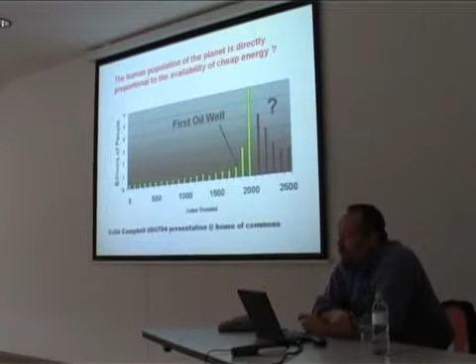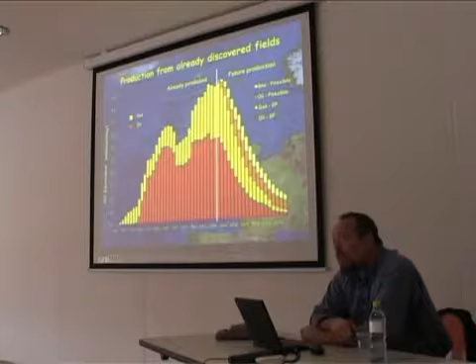The first idea is to communicate that the human population of the planet is directly proportional to the availability of cheap fossil fuel. And with peak oil, peak gas and peak nuclear all happening within the next 10 to 15 years, with simply not discovering enough mineral reserves to cope with increasing demand, particularly from the developing world, South

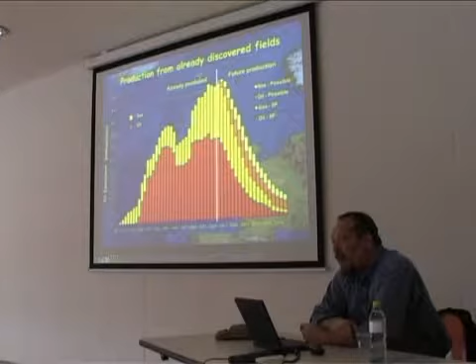America, China and India. It's clear that all of society, as we know it, will have to one day run off the limited supplies of renewable energy that are available within our respective national boundaries.

And as climate change accelerates, and there's a great deal of controversy about whether climate change is happening, but in the UK, not too much debate.

We're already finding spring comes 2 weeks earlier every year, and the weather is changing quite dramatically with very high levels of rainfall. But most important of all, flooding: too much water in the winter and not enough in the summer. So the traditional cliche of London as being a rainy, gloomy city is about to change.

What's critical is that 2/3 of the world's productive farmland will be lost by the end of the century.

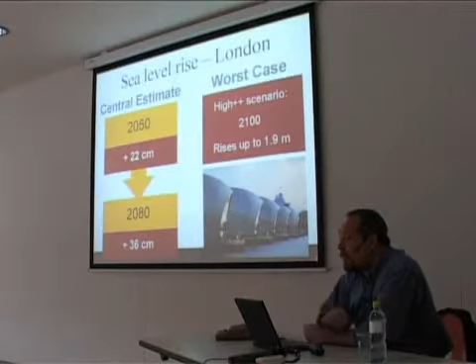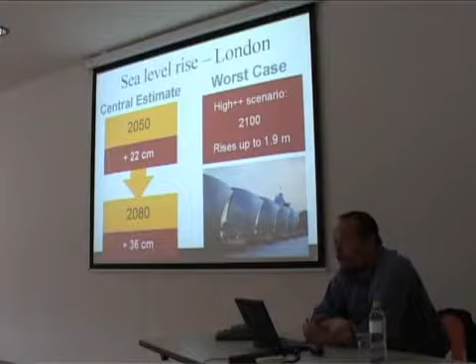And my country—this is a government slide from the Minister for the Environment—the claim is if we continue with carbon emissions as predicted, we're going to have around about a 2-metre rise in sea level and the average level of the Thames, and great chunks of London will be flooded by the end of this century.

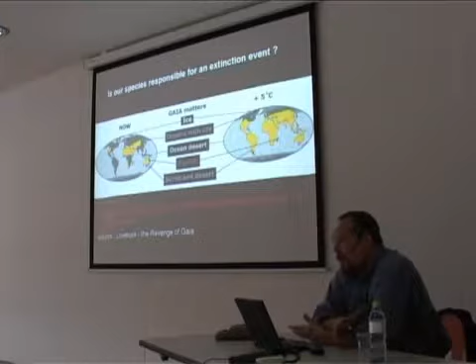So really, it's part of the architect's duty now to examine how we work, how we can design low-carbon lifestyles and work styles that mean people can choose an alternative way of life without thinking too hard and without trying too hard. How do you slip into this new paradigm, this new way of living on the planet?

And then there's another metric to discuss, which is the ecological footprint. The ecological footprint of London is the same as the rest of the United Kingdom. So all of the territory of the entire country would be required to sustain London.

So where do all the other cities find their sustenance? From other countries, but other countries don't have or won't have resource to trade. And I come from a country where we've just spent round about £60 billion fighting for fossil fuel outside our national boundaries. So to say that we haven't got the cash or the money to change the way our infrastructure and move towards a society that runs off renewable energy is ridiculous when we have enough money to fight for oil.

So the strategy we do—and this is a slide I produced 10 years ago now—is to try and look at how you can get a step change reduction in environmental impact at the same time as increasing overall quality of life. And we did a survey working with a local environmental charity called the Bioregional Development Group in South London.

And we found that a typical carbon footprint of a suburban Londoner in our area: a third of their carbon footprint was attributable to food miles, with the average British meal having travelled 2,000 miles from farm to dinner plate. A third was private car use, transport and commuting. And a third was heating and powering their home. And that was just at the turn of the century.

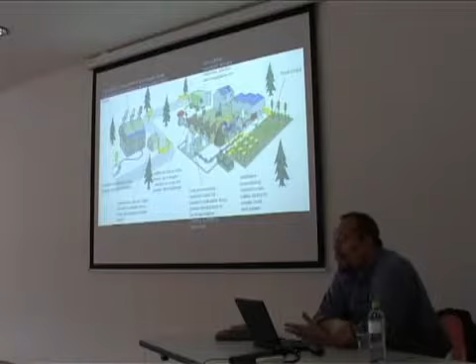We've started setting up things called zero fossil energy farms, where food is grown without using fossil fuels. Nutrient waste from the urban developments is fed back in to refertilise soil, agricultural systems, and food is delivered in zero emissions transportation using no packaging, so there's nothing to recycle. So that's how you set up a system, and then you can develop a whole framework where every single human activity feeds into the next, so there is no waste.

And we're really interested in this holistic systems thinking. Very difficult it is too, and very hard to build into very small projects, because as architects we only get given very small jobs. But if we don't start to agree on a system like this and think like this, it's not possible to achieve this overall transition from a fossil fuel addicted society to one that is actually capable of running indefinitely using the natural resources from within its own bioregion.

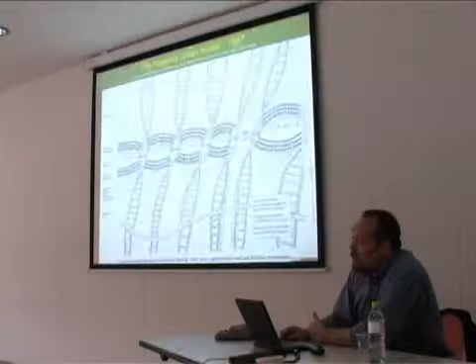And a lot of people say, well, what's the point in all this green stuff when you just simply buy a punnet of strawberries from Israel, which has been air freighted over, or runner beans from Kenya? My response is you can go quite easily and buy fruit or vegetables from a local farmer's market in brown paper bags on a bicycle, transported by your rucksack. And then all of a sudden you really need a zero carbon home and a zero carbon workplace. And these are the models that we've been developing over the years.

This is the area of productive land between these two wiggly roads, created enough subsistence food, if you like, and energy to run the linear community that was clustered around a solar-powered light tram system, with swale zones and rainwater storage lakes feeding biomass coppice with combined heat and power plants, and workspace mixed with housing around these little village greens.

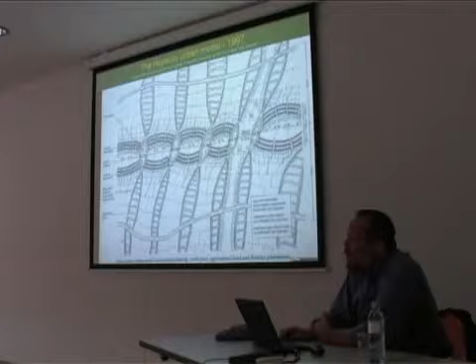So that's very idealistic, very theoretical. And really, how do you then change that and move that forward into a real practical project?

And this is a house we built 20 years ago now in South London. It's not exceptional, but it did try and anticipate a lot of these agendas. And we don't claim our work's perfect. We know it can be better. We know you can all do better. The point is, you have to start somewhere and you have to improve on it incrementally.

So this house was designed, we knew that the rivers were going to flood, so it had a completely brick ground floor, there was no plasterwork. All the services came down from the floor above. There was a thermally massive concrete first floor, and then a very lightweight timber frame for the upper two floors, which was mainly done for cost and reduction in embodied carbon.

The building, we had almost no money for windows when we built this. So we built a conservatory out of softwood, and a very simple aluminium patent glazing system which enabled us to clip renewable energy systems in as we could afford them.

Over the years, it's getting closer and closer to being a zero-carbon house. So money isn't actually an excuse for not delivering these ideas. Here you can see evacuated tubes, solar collectors added. There's photovoltaics recently been added to the top facet, and there's more coming as I can afford it.

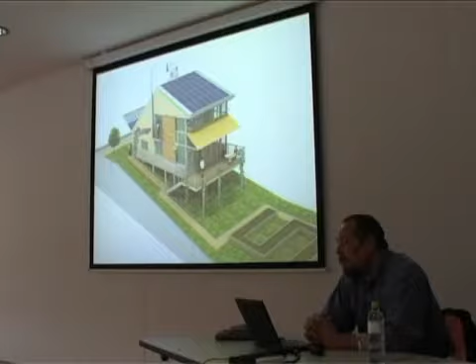Where we are is we've just got to the point where all those ideas in that house are now commercially available from your local DIY store, and you can buy a kit house called RuralZED, with absolutely everything: solar panels, wood pellet boiler, super insulation, passive heat recovery ventilation. It's much more technically sophisticated than the house we built 20 years ago. You can buy it at a fixed price and literally just go and build it yourself in about a month. So where did all this come from?

I did 14 years at Michael Hopkins and Partners, a big London firm, and this is one of my projects, Nottingham University New Campus. What this taught us was that the biggest problem with trying to achieve low-carbon architecture is economies of scale. What you can do on a £35 million university campus is quite different from what you can do when somebody asks you to design a single private family home.

By very careful repetition of details, and by very careful consideration of the industrial manufacturing processes within each works package, we were able to reduce the cost so that this came in at about £850 a square metre, which wasn't very much more than an absolutely bottom-of-market building regulations construction. But it was done at a large scale.

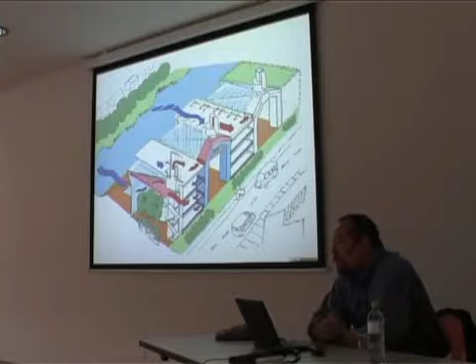What's interesting about this project is it uses very simple techniques: thermal mass, low pressure drop ventilation, photovoltaic powered heat recovery, wind assisted ventilation, passive solar gain, atrium spaces, a little bit of passive cooling from rainwater storage lakes, shelter belts.

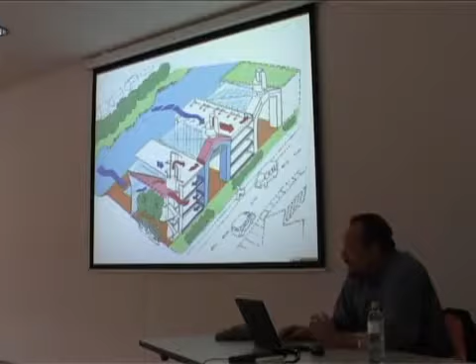All these ideas were coming in, and what's exciting for me is that that actually genuinely changed the architectural forms. It changed the forms of the master planning. It made a pedestrian promenade beside a rainwater storage lake the pride of place. All the cars were flung to the north. It created lots of transitory transition spaces in the form of atriums, which could provide casual meeting places for staff and students. They didn't actually cost any more than providing an external wall.

And the solar electric panels shown in the middle third of that atrium roof actually power the very low pressure drop Munters wheel and heat recovery unit, which reduces the heating load in the winter and reduces the cooling load because there's lots of computers in the summer.

So we'll be using tricks like using staircases as return air shafts, using corridors as return air shafts, using low pressure drop floor plenums, thermally massive raised floor tiles, exposed radiant ceiling soffits — all these tricks which cost very little, but when you put them together, the whole is very much greater than the sum of the parts.

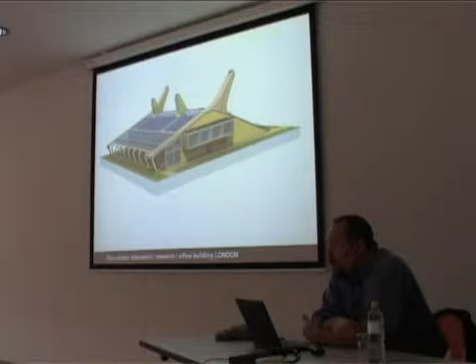So where have we moved from there to today? We're producing, we hope, the first climate neutral industrial building. This is incredibly low embodied carbon to build in the first place, and a sufficient amount of renewable energy systems are incorporated into the building fabric to enable it to meet its annual running cost and pay back the embodied carbon of the original construction over a 25-year period.

So the carbon debt is paid off within 25 years, and then over the rest of its life it becomes energy positive. If the renewable energy surplus produced each year is used to offset fossil fuel electricity from the UK grid, then it actually helps to repair the climate.

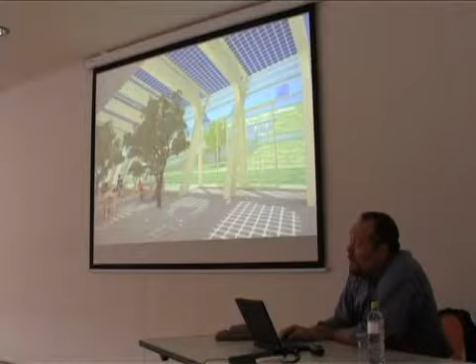So this is an example of the construction process and the building design starting to really transform, to really move into a new aesthetic. What interests me is how the building form, the morphology, the planning, the spaces and the materials start to be informed by energy efficiency and then by renewable energy harvesting techniques. I believe this blend of engineering and architecture creates a new aesthetic which defines the new zeitgeist.

And this is important because a lot of people say, oh, renewable energy systems, energy efficiency — it's an engineer's job, go away, try and tuck it into a basement, don't let it change my architectural forms, don't let it restrict my architectural expression. And I hear this a lot.

But I think where we're going is a new architectural language. This is the continuation of the modern movement, which is designed to create this survival — the infrastructure for our collective survival.

So what we found on this building was that, for this particular client, pretty well all of the energy consumed was electricity, and it was used for ventilation. They had very high levels of ventilation running virtually all the time because they hadn't actually worked out that it was even worth turning these systems off.

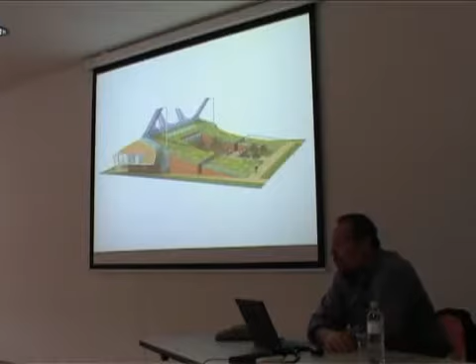So we found in a survey that the building was only occupied for 30% of its time — 70% of the time it was asleep. So we designed a building that didn't need any energy to be asleep, virtually shut down, and then when someone came into it and activated it, it woke up and used a tiny amount of energy when it did. That's how all these tricks start to come off.

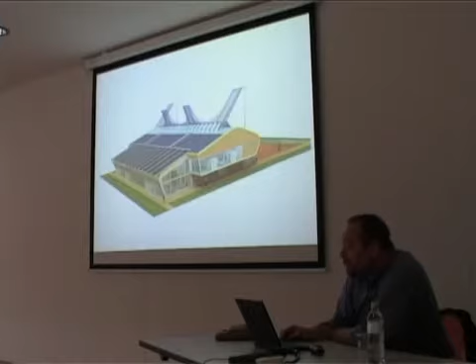So this is possibly the industrial estate of the future, or the office park of the future. And where we got to a long time ago was a conclusion that had already been come to in this part of the world, particularly southern Germany, with the work done by the Passive House Institute.

The conclusion was that actually a zero heating specification was very easy if you had enough thermal mass, reduced losses through ventilation, and very high levels of insulation.

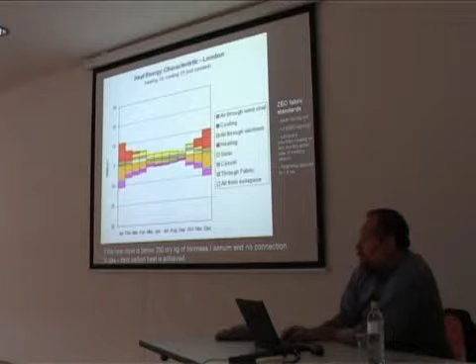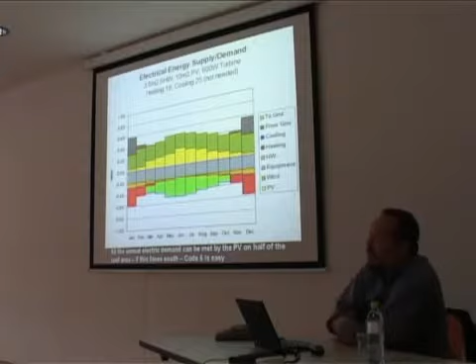And then we found that by being very careful with renewable energy systems, we could just about, over the course of a year, generate enough total electricity to meet the overall annual demand. That would mean exporting in the summer when you're generating too much, and importing in the winter when you're not generating enough.

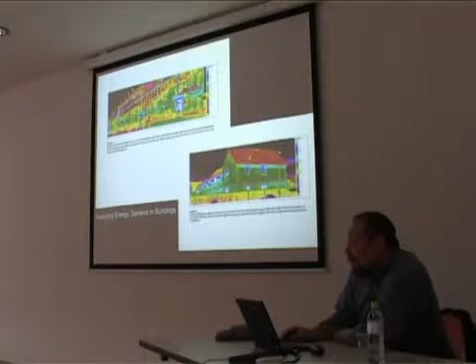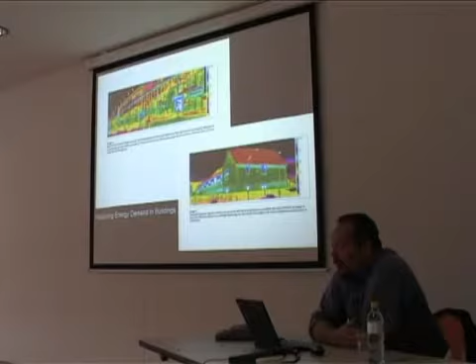These are really slides showing the infrared effect, showing how BedZED's south facade has more or less the same, or has a better heat loss than the insulated wall of the building regulations development immediately over the fence.

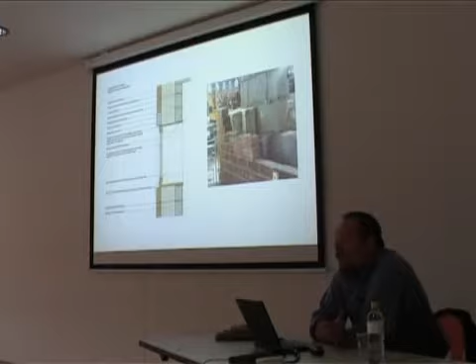And we had very simple construction details: using granulated blast slag cement replacement as a load-bearing inner leaf, hollow core planks spanning between cross walls, 300 millimetres of mineral wool insulation — rock wool, for its vermin resistance and non-combustion — and then any locally available rain screen, whether it's the nearest brickworks to the site or green oak framing.

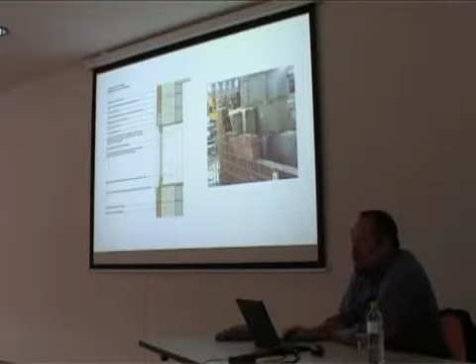And we invented a special two-part wall tie, which made the construction of these 300mm cavities very easy. So this was 10 years ago or so.

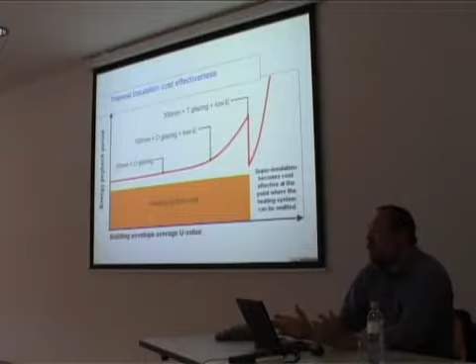And what we found was that if you did this properly — 300mm of insulation, triple glazing, and low-E glass — you're actually able to take out a heating system entirely. The cost of removing the heating system paid for the increase in the fabric performance.

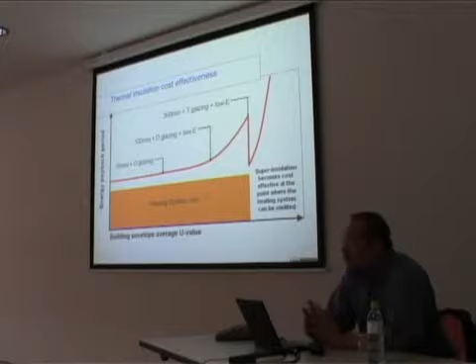So it's a virtuous circle. If you went and did only a little bit of extra insulation, then it really didn't work. And this was a slide we used at the time to get BedZED built.

The next big idea is passive heat recovery ventilation. We do not subscribe to the passive house idea that you would have a fan running for the life of the building. So I'm going to show you some of these techniques and technologies which we've developed over the years, and try and explain how that affects the architectural form and creates a new aesthetic and a new way of planning.

So using displacement ventilation, if you duct that into the bottom of a room and extract stale air at the top of the room, you get a room that is breathing all the time. No fan is needed, no electricity is needed. You have to fit less solar panels on your house if you want to be zero carbon. And above all, there's very little maintenance, and it generally works very, very well.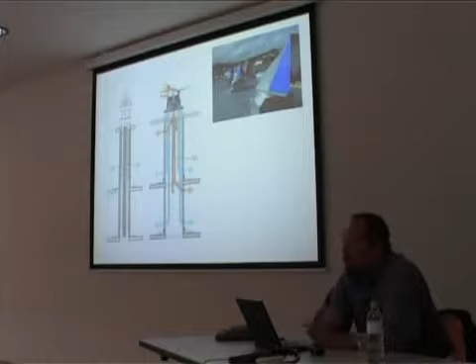So we spent a lot of time and money wind tunnel testing these, working with Arup. This is the National Physical Laboratory in Teddington, and trying to get them to rotate down to 1.5 meters per second wind speed, while measuring the suction to make sure there was enough push and pull to get the ventilation system to work.

And that's part of the industrial design process. But if we hadn't tried to perfect this particular technology, it would be harder for us to deliver affordable zero-carbon solutions in the UK and other countries. We've now gone into mass production in China on this particular idea.

Where we've gone to is we've modified the heat exchangers to use porous flat-plate heat exchanger plates, which are dipped in a lithium salt, which absorbs moisture from the incoming fresh air, so you get a little bit of passive dehumidification. Then we use solar evacuated tubes, solar thermal tubes, to boil the water off the lithium saline solution, regenerating it and enabling it to be passed back through the heat exchanger again. So it's a zero-waste process, and at the same time it also cleans and scrubs the air, takes out particles, reduces asthma inside the house. And the good thing is it kills SARS, which is really, really critical in certain parts of the world.

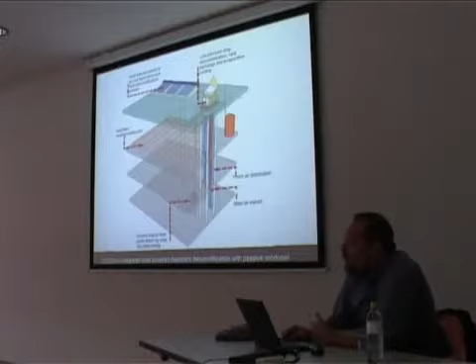So that's how these kinds of technologies, if you like, call it solar dehumidification and possibly solar cooling technologies, are going to change architectural form in many parts of the world.

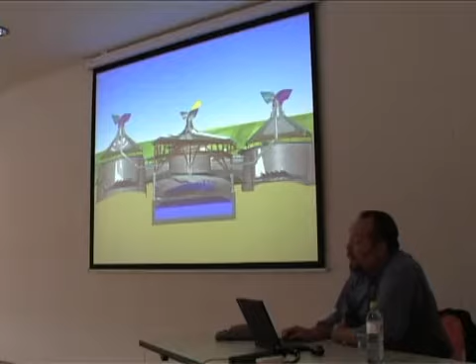So this is a building we've completed about 12 years ago at the Earth Centre in Doncaster, and it's a conference centre. It sits on an interseasonal heat store. It has all the heat recovery ventilation ideas, but the big innovation there was it was actually built from reclaimed materials, so about 80% reclaimed by volume.

This is BedZed. This is the combined heat and power plant, and this runs on urban tree waste. So basically, urban trees grow over roads, need pruning every year, and these prunings can be chipped and heated without oxygen to produce a hydrogen-rich methane gas, which is then cleaned and squirted into a spark ignition Scania truck engine, or in later slides I'll show a fuel cell.

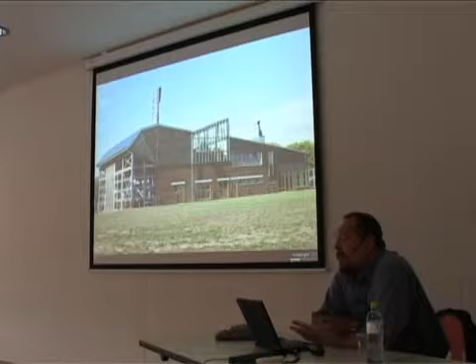But what was interesting about this building is that it has a power station, it has a grey and black water treatment plant in the glass house, it has changing rooms for the local community football pitch, it has a village hall stroke dance hall, and it has a community cafe. And that's what interests us, is combining all these rather strange functions into one shape or one roof.

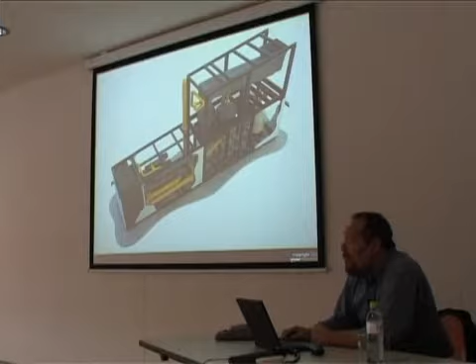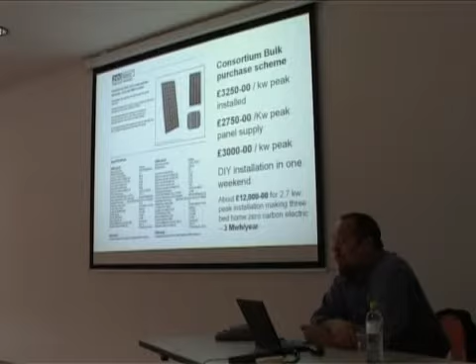The least successful technology we've been involved in has been the biomass-fueled combined heat and power plant. And frankly, the BedZed one ran for about 1 year before the company that ran it went bankrupt, because they had to strip it down every 3 months to clean all the carbon out of the pipes. However, 10 years later, this technology is now perfected, and we're now going to reinstall that idea. So there's a lot of soul searching, a lot of ideas like this need testing.

The next idea is simple solar electric panels. How does that affect architecture? Now, we've got to the point where these panels have actually come down since this slide. They're now about £2,500 a kilowatt peak. So a 3-bedroom family house, certainly in the UK, probably in Lausanne, for certainly around €10,000 would have free electricity for the rest of its life.

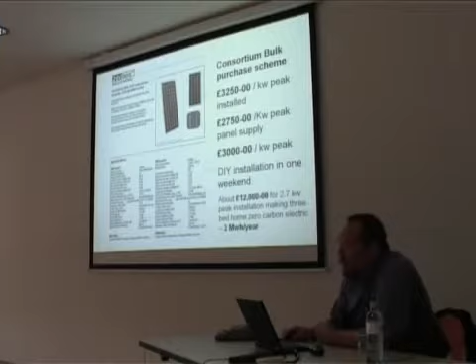This is important, and it has only happened because the developing world, particularly the Chinese and possibly the Germans, though their panels are still rather expensive, went into volume production. The last solar panel manufacturing plant I visited employed 2,500 people and was about the size of EPFL.

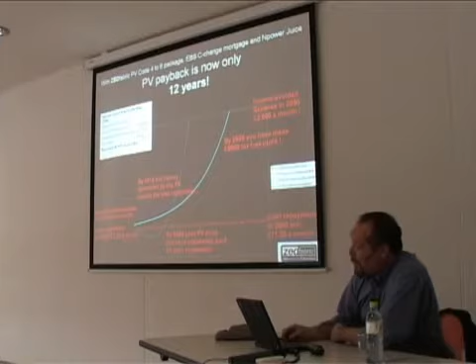What we're developing at the moment is photovoltaics integrated into the roofs of buildings. We're developing translucent tiles so that previously unusable attic roof space can become a delightful conservatory, a non-heated extension to your living area, providing it's adequately vented. This is a Georgian house in Southend that's just had this conversion.

I'm going to quickly show what happens with these projects. This is a grey and black water treatment plant, the living machine at BedZED. It's currently decommissioned, mainly due to running cost. You can get an idea that works technically, but if it costs too much to run in terms of labour, it will not survive.

So what's happened now is that the water company took over this technology and wanted to prove their own was better. They built an advanced membrane bioreactor, put in a shipping container just next door to this installation. Of course that's lower cost to run, but it uses double the electric consumption. So this doesn't mean the original was wrong, and in certain situations it is very much right.

The next idea is how to design buildings made out of reclaimed materials, because we've already extracted enough material from the ground, from the earth.

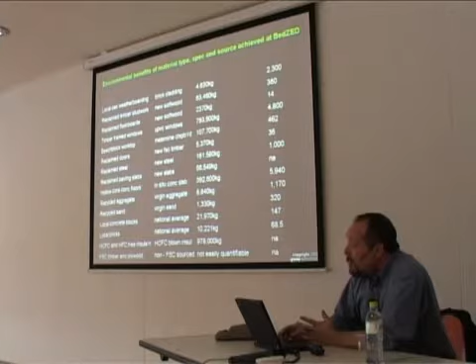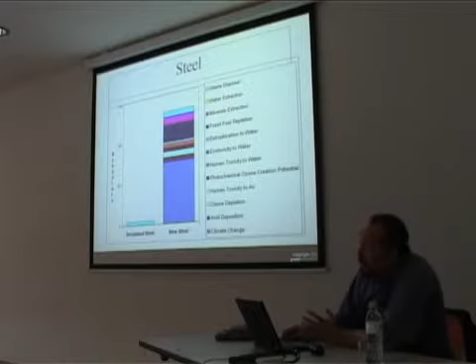We're very proud to understand where your embodied carbon goes, because if you're trying to sort out climate change, embodied carbon becomes almost as important as running carbon, and certainly on very low energy buildings that becomes the case very, very quickly. But if you're trying to achieve climate neutrality, understanding the carbon footprint of different materials and using reclaimed materials rather than new becomes absolutely critical.

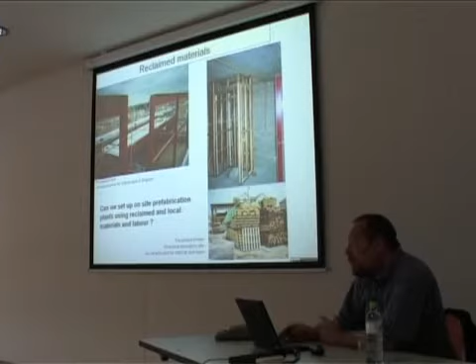There's a whole supply chain that's sprung up about how to make those ideas work: how do you scavenge steel from demolition sites and reuse it in new buildings, and how do you avoid using new timber in new construction?

This is Bedzed in South London, about 20 minutes from London Victoria, on the edge of land previously designated for sewage treatment, then for gravel extraction. It has cement works nearby, a sewage treatment plant, concrete works, and an IKEA. Pretty well every antisocial activity you can think of happens around this area.

So the land is devalued, and we were able to really take this on. It was given as an experimental area, and more of this estate was going to be built on this land until we got involved, working with London's oldest housing association, the Peabody Trust. Really, that's all the local people expected, or that's all they were going to get: bottom of the market, dormitory suburb, with very small gardens, very small windows.

And this is what we managed to achieve, really trying at the time to be state-of-the-art, near passive house standard, reasonably medium to high density for the UK. Solar homes, using passive solar gain, very important. 50% of the external glazed screen is openable, and you can see the shade line, the shadow line running across the overhang from the floor above.

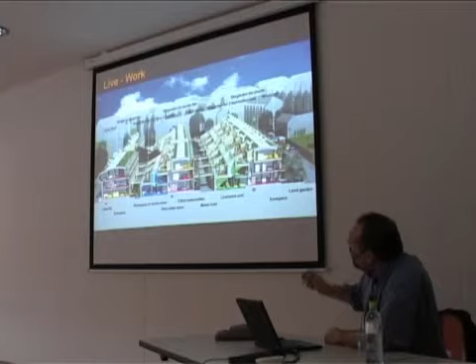We've tried to replicate that at BedZED with homes facing south, offices facing north, so you don't get involved in expensive solar control and shading. And by using the roof surfaces of the offices as garden to the housing units, we managed to get pretty well every home to have its own private defensible space or garden area.

At the same time as getting about a kilowatt peak of photovoltaics for every home, very high levels of insulation, passive heat recovery ventilation, very high levels of daylight, and very good levels of summer purge cross ventilation.

So aerodynamics started to inform the building plan. And what's important is that this is the plan, Beddington High Energy Development, that the council gave themselves permission for, and this is what we built. We managed to get all of the homes into the purple areas on this site plan. The yellow is live-work units, the pink is pure workspace, and the light pink is shared communal facility.

So by not having to pay for the land, which is about 35% of the floor area built, or the site that it sits on, you can then put that money back into the additional cost of the zero carbon construction.

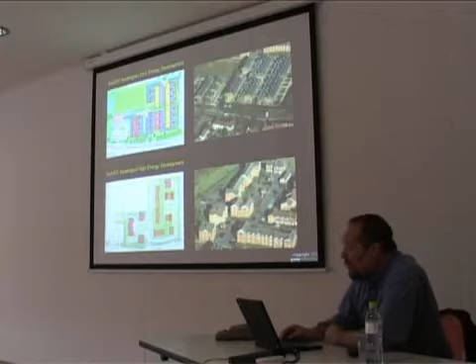We've made the development permeable so that you can move through the site. It's designed to maximise the efficiency of the district heating scheme, which the biomass boiler is here. And this opens up, in a longer-term master plan, to a large area of hopefully one day reclaimed parkland next to a tram stop.

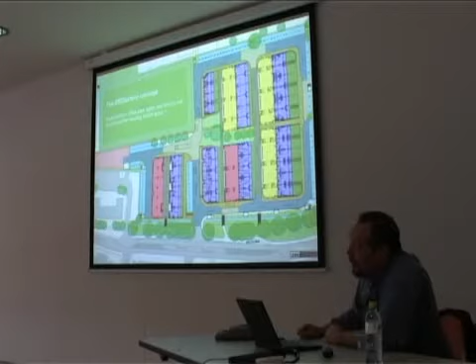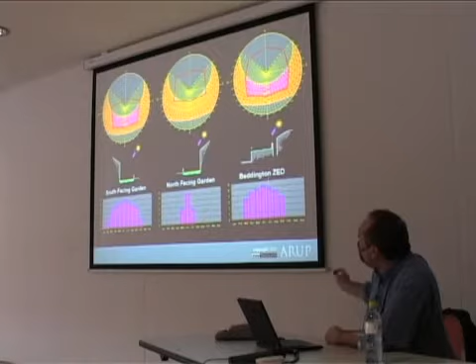So this is the study that we did to look at the sun hours on the roofed gardens, because although they're facing north, they have more or less the same number of annual sun hours as a south-facing garden with a 2-metre-high perimeter fence, which is the British prevalent suburban condition.

And this is the development today, with this being roof lights for the workspace below. This is roof terraces with 300 millimetres of soil on top of the workspace. This is the maisonettes. The living room on the maisonettes in this part of the scheme actually looks straight across to the roof gardens here.

These are shared footbridges between two flats, and then here are the upper floor single bed flats. And here are the passive heat recovery ventilators in the form that they were 10 years ago.

So this is the south facade. Here we've moved the living rooms down onto the ground floor because the gardens are on the ground floor. And this is the top floor flat interiors.

And the mistake we made was building integrated photovoltaics into these sun spaces. The re-radiation from the back of the photovoltaics was actually very high, so that didn't actually act as a shading system at all.

And then the client omitted an opening light here because he said that it wasn't going to get as hot as we said it was in the summer. And that is a recipe for disaster. But we're now fitting, because it was designed to take opening lights, we're now fitting opening lights in those clear panels. So it's very interesting.

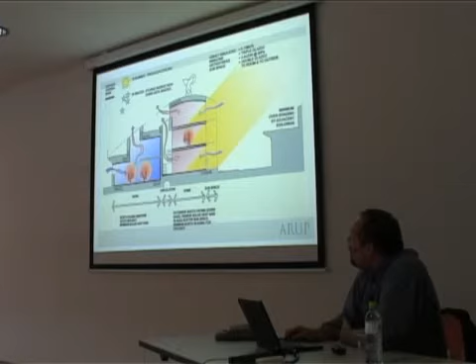A lot of thinking and a lot of analysis, a lot of building physics modelling has gone into the design. There's virtually none in the actual development, which is quite the opposite of most engineering-led approaches to low-carbon design.

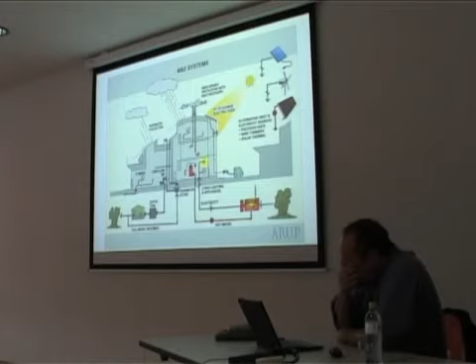So actually what's inside these houses is an oversized hot water cylinder which is connected up to a centralised CHP. And the only thing that really doesn't work that well on this project is the most complex mechanical component, which is the biofueled CHP. So in future projects, we've decided to simplify our technologies even further and rely more on the things that work really well with no moving parts, like energy efficiency, photovoltaics, and passive heat recovery ventilation.

And this sets up something very important called reverse commuting, because in suburban London, at rush hour, everybody gets on trains and goes into the centre, whereas here, there's a lot of people who come from more central residential areas to work at BedZED. So it's what we call reverse commuting, and that doubles the capacity of public transport without any infrastructure investment at all. So these are critical ideas.

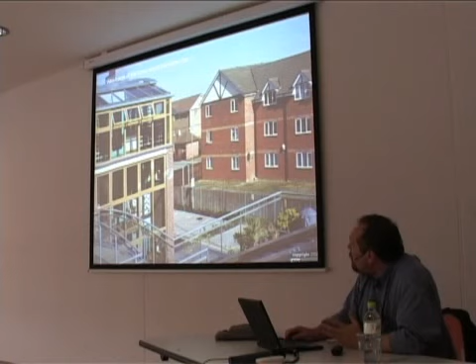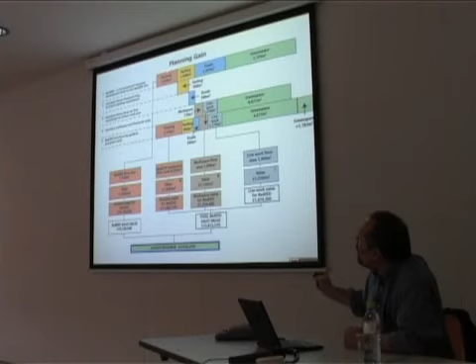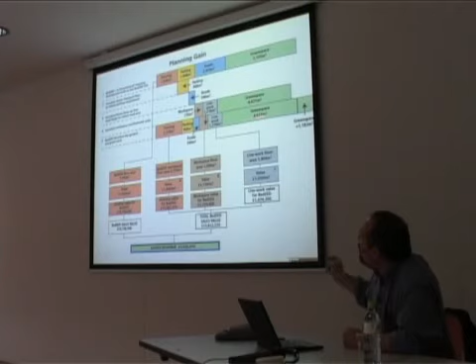I'm now going to whiz through really how the same ideas can be interpreted to produce different building forms within different places and indeed different climates. And one of the ideas we want to introduce is this idea of carbon trading in return for planning gain, where you actually analyse the area of a development allocated to housing, parking, roads and green space. That's the old Beddington High Energy development. That's BedZED here, more of pretty well everything, including extra workspace.